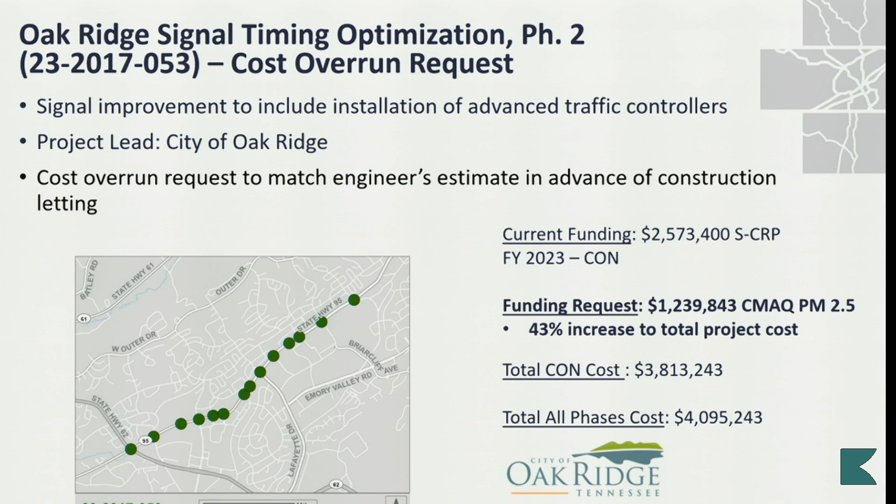I will go briefly over the status of funds summary, where we stand within that overall program. Again, this is about $1.25 million that's being requested. That represents 26.7% of the current available PM 2.5 balance of $4.6 million. As of today, that would draw that number down to $3.4 million. We would get a new allocation of funding on October 1, the fiscal 24 balance, that would bring that number back up to $8.2 million. If you look at a longer term, what is available through the life of the TIP, this request is 6.4% of the projected funding available balance. The remaining TIP period balance with this project overrun included, in column fiscal 23, this would leave us with $18.1 million available within the CMAQ 2.5 program.

And we've lost that screen, but we're still up there for y'all.

So, and we're back. That is kind of the overview of the numbers. If there are specific questions regarding the nature of the overrun or anything, Oak Ridge representative Roger Flynn is here that can answer any questions or provide additional insight into the cost overrun status, although I know all of you on this board are familiar with the environment we're in with estimates.

Do you want to speak to that, and care to explain briefly why the cost overruns are so significant?

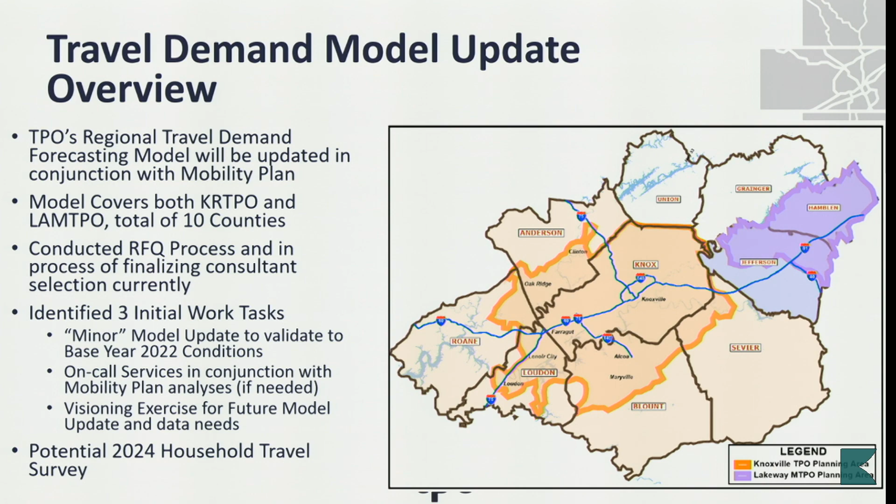Typically, I do that work - we get the model from the consultant, and I do the model runs to support the long-range plan development. But this time we foresee that there might be some specialized analysis we want to do, for example the TDOT choice lanes, evaluating things like that, or even regional bypass stuff where we might want some additional support.

Then finally, what we want to do is have a major visioning exercise for the next generation of our model. We've been using the similar model framework since 2012, just kind of updating it with minor updates since then.

We recognize a lot has changed since 2012, and Jeff mentioned the household travel survey that we're looking at as a statewide potential. Our last survey was done in 2008, and obviously things have changed quite a bit since then, post-COVID, especially with increased working from home and online shopping.

Here, maybe not as much as some areas, but we have new modes of travel, the micro-mobility, electric scooters, that kind of thing. So we want to update that survey, and then with that, develop an entirely new potential model structure. There are several new techniques out there for modeling.

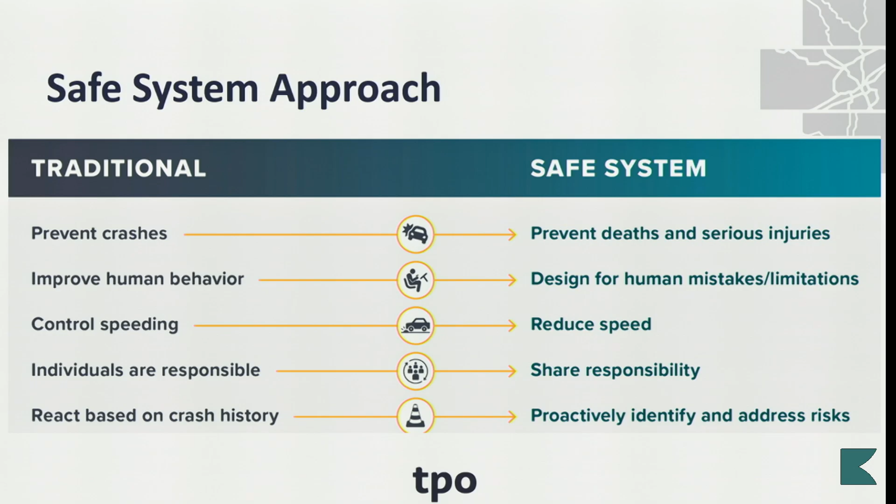These are the guiding principles that focus on the 5 aspects of safety, which are safe road users, safe vehicles, safe speeds, safe roads, and post-crash care.

Now I'll walk through some of the core components of the plan, including briefly touching on the analysis we did, which informed the development of the action plan recommendations. I'll just say we really made it a priority to fit each jurisdiction's goals within this plan, as there's a lot within the TPO to consider.

First, equity, of course, is super important. Studies show at the national level that people of color are more likely to be killed in crashes, as well as older Americans. We know some of these disparities are included in the Knoxville TPO region. It was therefore important that we prioritize equity in this plan.

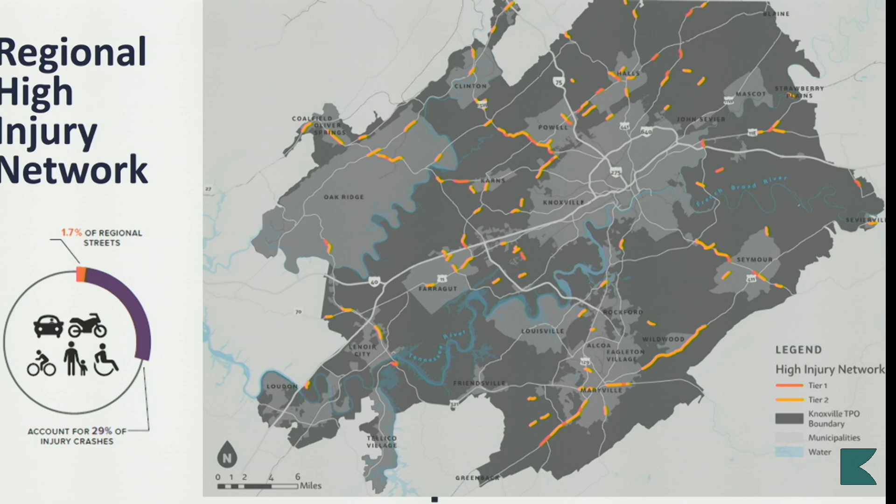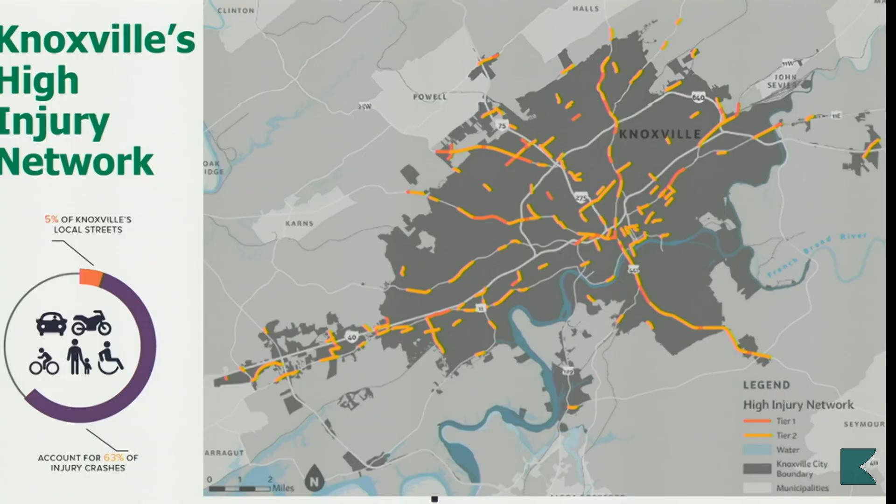Okay, so moving on to the crash profiles and the predictive analysis. Before I dive in, I just want to give a shout out to Ellen and the TPO team. They did a lot of pre-work on cleaning up the crash data, which made this process a lot easier and quicker, and this is valuable information. So that was very helpful.

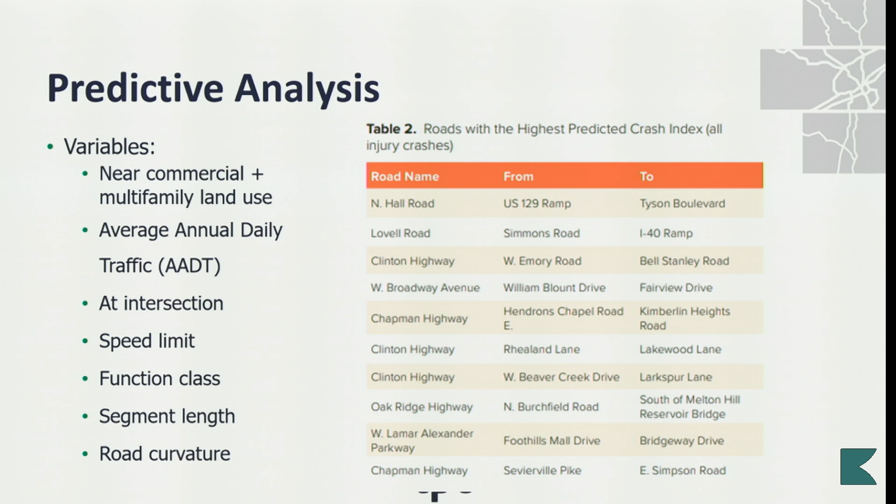So the list of variables is on the screen on the left that we use to compare roadways with observed crashes to other roadways in the area. These variables focused on land use, roadway characteristics, and relation to intersections. The table on the right shows roads with the highest predicted crash index, which we can also look at on a map here shortly.

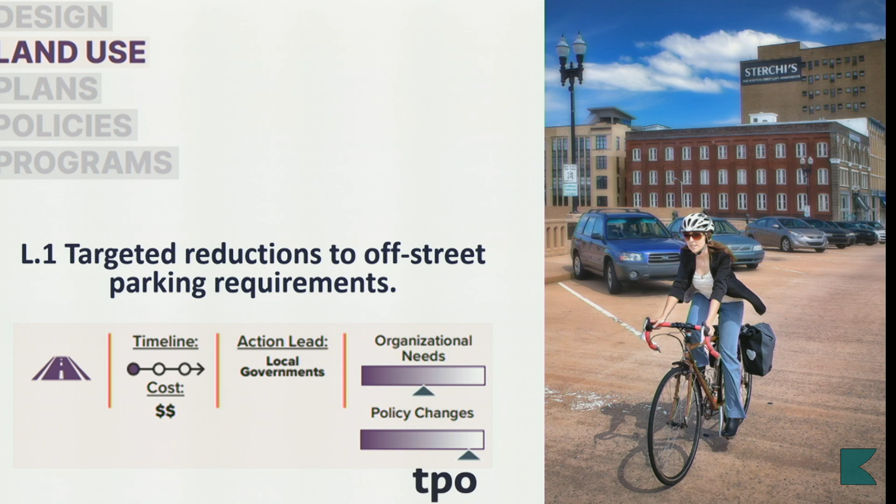Another land use item would be to require new developments to consider bicycle and pedestrian impacts. This can improve roadway safety by ensuring that the needs of vulnerable road users are emphasized as the region grows.

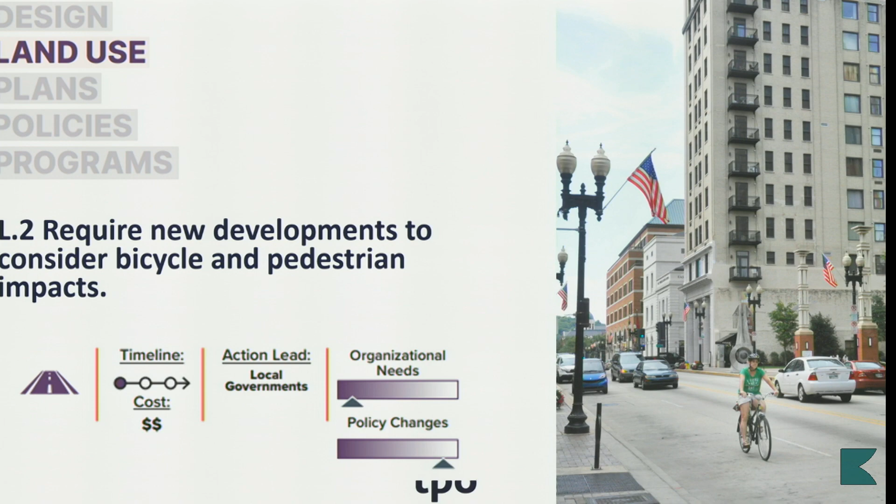The third land use recommendation would be to expand bicycle parking requirements in appropriate locations. This could include bicycle requirements and unbundling them from vehicle parking. This could support multimodal transportation by advancing the feasibility of bicycle travel for short trips in densely populated areas and ultimately improving safety for these users.

Moving into the plans category for the recommendations, the TPO should consider auditing bus stops along the HIN to identify both quick build strategies and long-term improvements as needed, including ADA compliance. Safety issues for vulnerable users can arise when transit stops lack comfortable and accessible connections. So these transit stop improvements can include anything from relocations to enhance safety, ADA improvements, or the addition of rider amenities to improve comfort and accessibility.

Moving on to the policy section, a policy action item would be that vulnerable road users should be provided with safe routes when construction projects or road work can disrupt conditions. This can be a simple coordination item that can ensure traveling is safe for all types of roadway users.

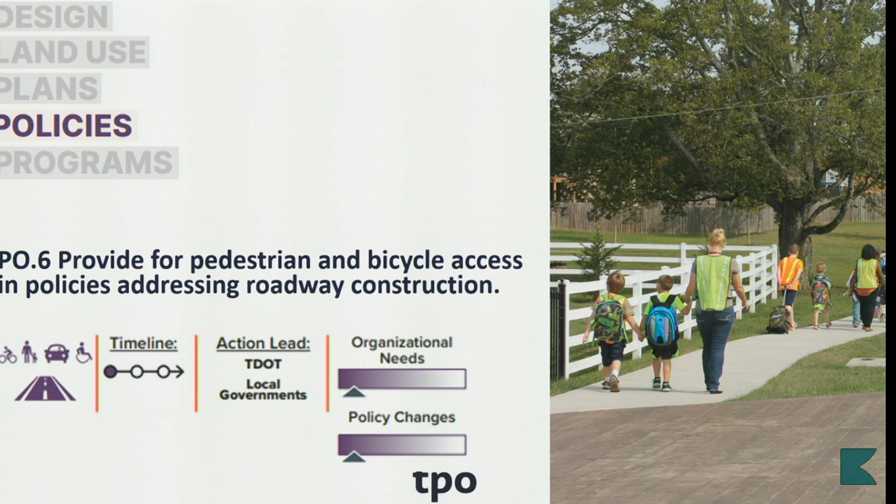And then the Regional Transportation Demand Management, or TDM program, Smart Trips, provides alternatives to single occupancy vehicle travel through centralized information and travel rewards. So increasing the visibility of this already existing program and spreading the knowledge that this exists could improve safety and help people use other travel modes besides single occupancy vehicles.

And then we've talked about this before in this presentation, but improving the crash data and transportation transparency - that's essential to understanding and responding to crash patterns in the Knoxville region. And like I said, the TPO is already doing work to improve the crash data, but establishing a program could be essential to supporting these efforts. Crash data should be shared publicly, and the TPO could explore ways to collect data on near misses and unreported traffic-related injuries.

And then finally, it would be recommended to establish a regional safety evaluation working group to monitor performance measures. A regional working group focused on monitoring performance measures would ensure that regional progress on addressing these strategies is tracked and documented over time. And so the Knoxville TPO could lead the formation and organization of this group.

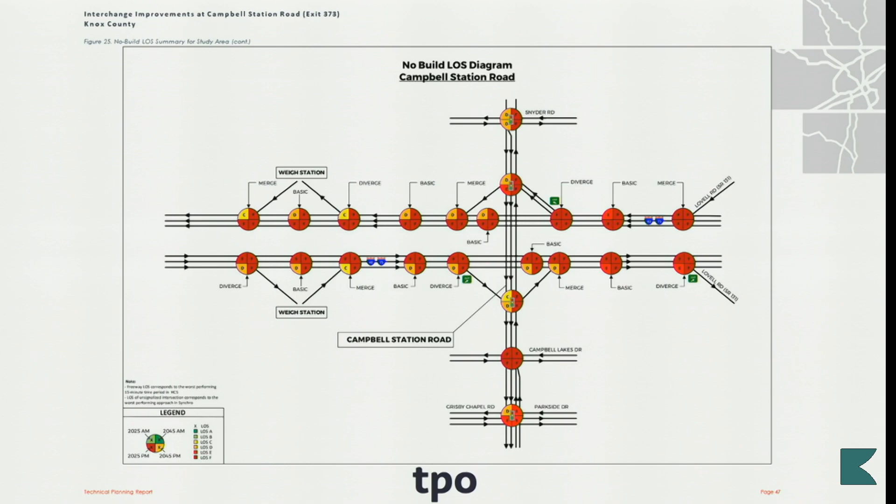So what did we do in response? As part of the technical planning report, we took a look at 3 potential improvement alternatives, utilizing TDOT's intersection and interchange evaluation tool. For time's sake, I won't go through each individually, but I'll mention we analyzed a diamond with a loop configuration type alternative.

We also took a look at a single point urban interchange, and then lastly we evaluated the diverging diamond interchange configuration. Many of you are probably familiar with the diverging diamond—within the region we have one up at exit 407 in Sevierville. The most recent one we completed was in Washington County in Jonesboro, I-26, at exit 17.

So ultimately, if you can envision with me—and I know the pointer's not working but I'll try my best—if we take a look at the bottom of the screen, South Campbell Station Road, here's how a diverging diamond works. If you're headed north towards the interchange, you reach this little circle here, which we commonly refer to as a crossover point. It's generally in the vicinity of the ramp terminus, and that's the point at which traffic gently diverges from the right side of the road to the left side of the road, where it remains through the entire crossover.

Because traffic is on the left side of the road through the crossover, traffic is free to make that left turn onto westbound Interstate 40, free of having to cross opposing traffic. Similarly, southbound traffic coming from Snyder Road hits the crossover point at the terminus of the westbound ramps. Traffic gently diverges over to the left side of the road where it remains, and again is free to make that left turn onto eastbound I-40, free of opposing traffic.

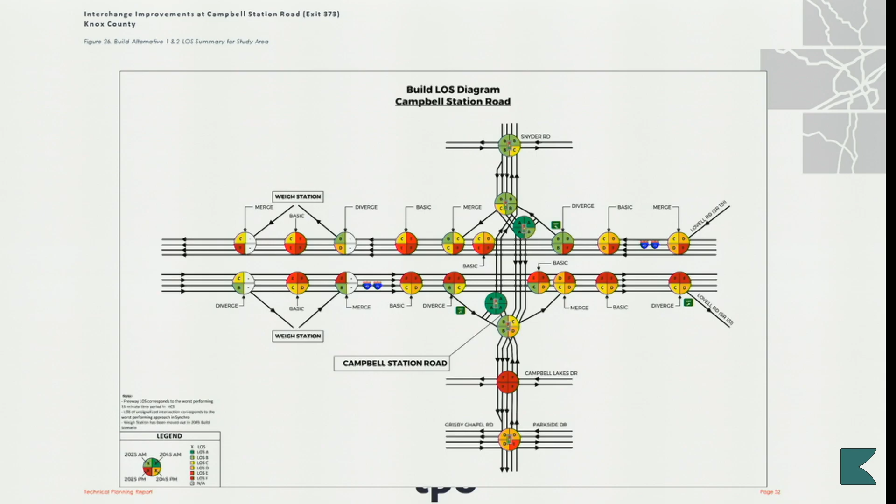One more. There we go. So if you can see on the screen, take a look.

As part of the technical planning report process, we evaluated two different variations of the diverging diamond interchange. The first, shown in red, is the current existing footprint of the existing Campbell Station Road interchange with the ramps and bridge. We also evaluated a diverging diamond concept roughly 300 feet to the west of the existing footprint, over Interstate 40.

Ultimately, as a result of our analysis, the diverging diamond over Interstate 40 has been selected as the preferred option to move forward with. The diverging diamond in the existing footprint presented serious constructability issues and would require considerable reconstruction of the eastbound and westbound lanes of Interstate 40, resulting in excessive costs.

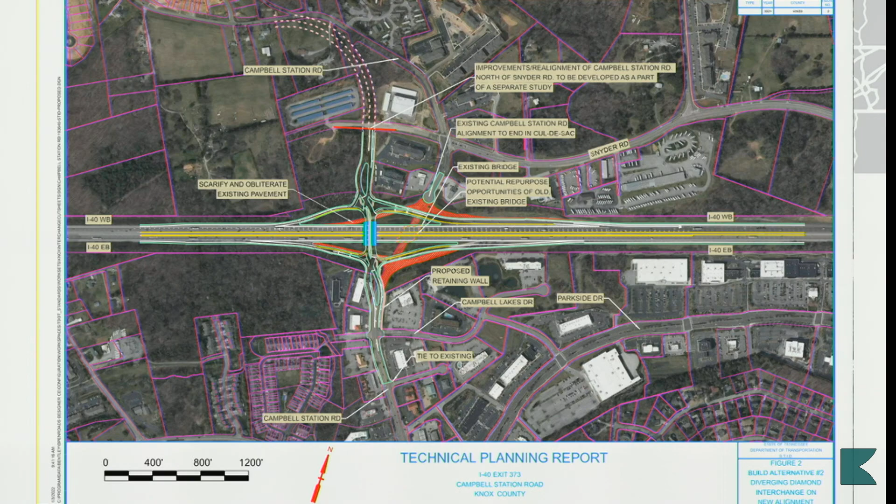The project itself was budgeted in fiscal year 2023 under a general fund transfer for a state highway partnership, which we're currently partnering with the town of Farragut on. The portions within the interstate right-of-way, including the bridge over Interstate 40 and the ramps, are being funded at 100% at the state level. The areas to the north and south, outside the interstate right-of-way, we're partnering with the town of Farragut on at a 50% share under our local interstate connector program.

You can also see at the north of the screen the dashed dotted line. That's an improved connection that will also be included in this project, north of Snyder Road. It'll be the northern connection of Campbell Station Road, an improved connection replacing the existing one.

So, having said that, we've talked about what it means to deliver a project more efficiently. That presents the next question we posed to the team: how do we deliver a project of such complexity more efficiently? That answer comes essentially in two parts, simplified compared to the past, I guess we could say.

As I said a few minutes ago, we're integrating project teams, but we're also integrating various systems in order to leverage opportunities. One system we're very excited about here at the department is our new project delivery network. In contrast with our previous system, known as PPRM, which contained roughly 180 activities throughout the entire project delivery process, it also promoted a very tip-to-tail approach, inefficient to some degree.

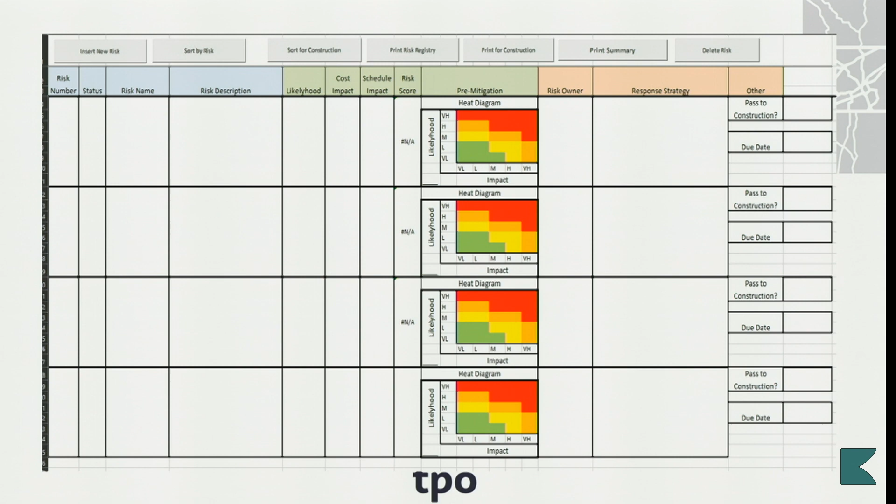We can imagine one of our key deliverables, which of course is our project plans. If we're not ensuring that our plans as we go along the way have all the details they need in them, everything is on the plans that we need, we can imagine if we get too late in the process, we identify things late in the process, it sets us back in terms of our schedule. It sets us back on our budget as well.

With quality control, what we're doing is we're controlling the quality of the engineering by checking our plans, our calculations, our input, our documentation. We're doing that for compliance, accuracy, and ultimately it results in a quality control checklist by each of the functional area leads.

Subsequently, we'll also, as part of that quality check, be doing a quality assurance check as well, where we're ensuring that quality control processes were followed, and then ultimately we'll also check the plans for safety and constructability as well.

So those 6 elements of the project management plan are very essential to how we will meet our goals and objectives and deliver the projects more efficiently going forward.